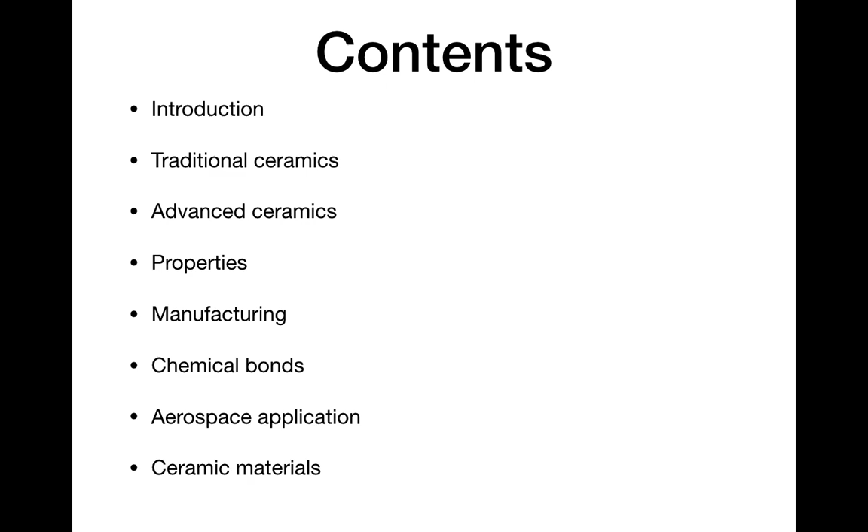Ceramics. A ceramic is an inorganic, non-metallic solid made up of either metal or non-metal compounds that have been shaped and then hardened by heating to high temperatures. In general, they are hard, corrosion resistant, and brittle. It comes from a Greek word meaning pottery.

The clay-based domestic wares, art objects and building products are familiar to all of us, but pottery is just one part of the ceramic world. Nowadays, the term ceramic has a more expansive meaning and includes materials like glass, advanced ceramics and some cement systems as well.

Traditional ceramics, also known as pottery, is one of the oldest human technologies that we have seen. It has dated to around 18,000 years old. These are usually clay based ceramics. There are different categories and major types of pottery are earthenware, stoneware, porcelain and bone china.

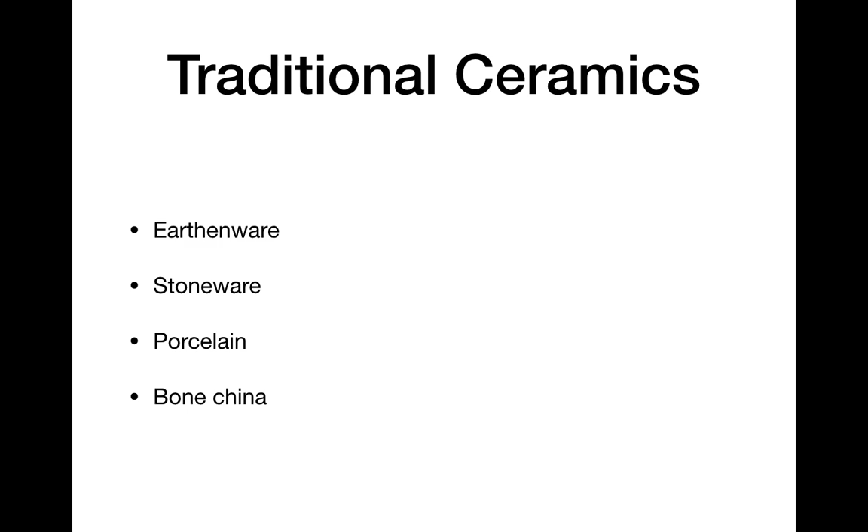Advanced ceramics. Advanced ceramics are not generally clay based. Instead, they are based on a combination of the two, or any one of the two: oxides and non-oxides. Typical oxides used are alumina and zirconia. Non-oxides are often carbides, borides, nitrides, and silicides. For example, boron carbide, silicon carbide, and molybdenum disilicide.

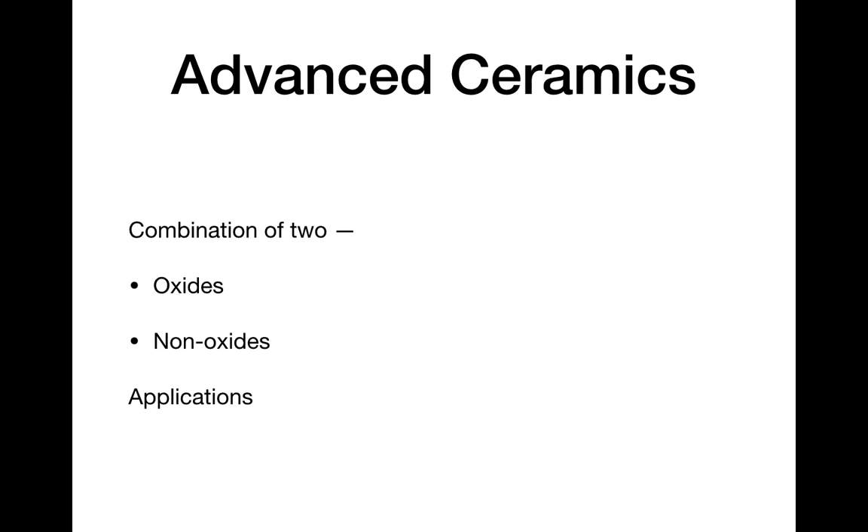Next, properties of ceramics. The most important general property of ceramics is that they are refractory. They are rough and tumble materials that will put up with fair amounts of abuse in the most ordinary and extraordinary situations.

Some of the properties that ceramics have: high melting point, so they are quite heat resistant; great hardness and strength; considerable durability, they are long lasting and hard wearing; low electrical and thermal conductivity, they are good insulators; chemical inertness, they are unreactive with other chemicals.

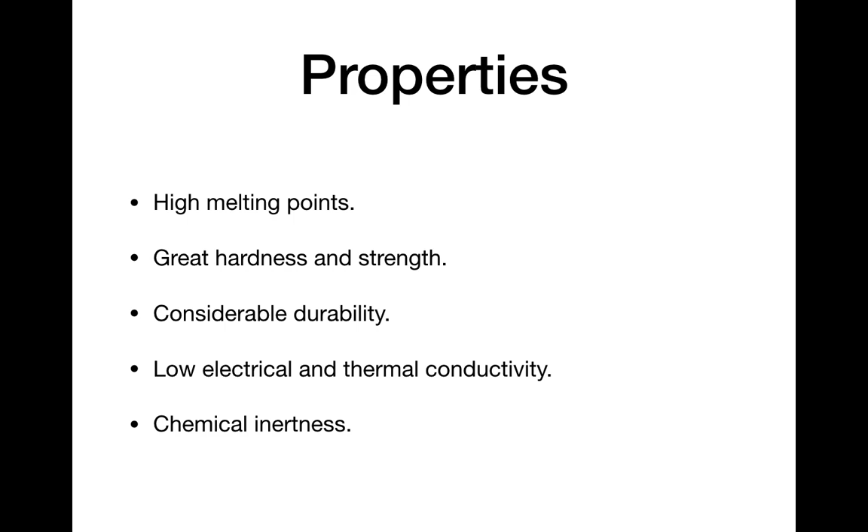So, how do you make these ceramics? The manufacturing process of ceramics generally starts with digging the raw material. So it starts with clay based material dug from the ground. Then this clay based material is mixed with water and other material so that the granules of clay are bonded together.

Next, this clay based material mixed with water and other material is squashed into a shape, or it is molded into whatever shape the product requires. After that, it is fired at a very high temperature.

The US Geological Survey listed six different types of clay usually mined in the United States: common clay, kaolin, bentonite, ball clay, fuller's earth, and fire clay. Each one of these also has numerous different grades and qualities, so it's probably more accurate to talk about china clays or ball clays.

These ball clays are used to make things like fine porcelain, tableware, bathroom suites, but even within a single ball clay mine, different grades of clay will be simultaneously excavated from different areas and kept separate for different end uses.

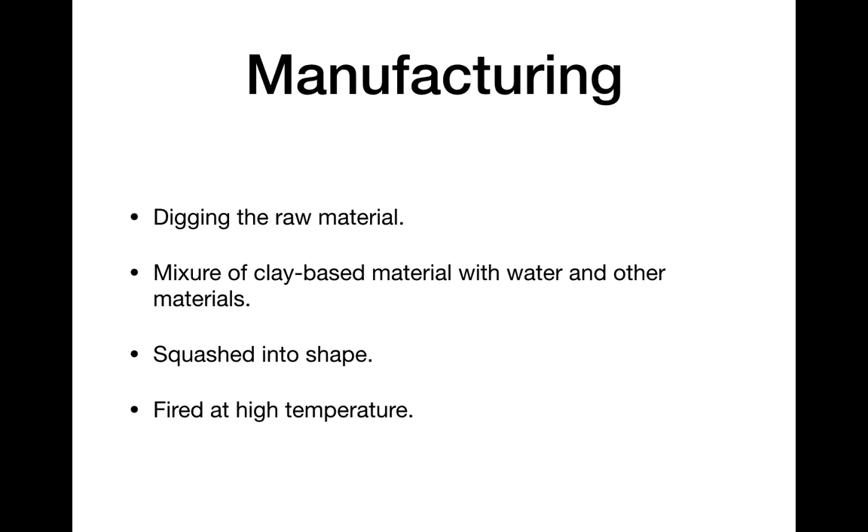Chemical bonds of ceramics. Underlying many properties found in ceramics are the strong primary bonds that hold the atoms together and form the ceramic material. These chemical bonds are of two types. They are either ionic in character or covalent in character. Ionic in character involves a transfer of bonding electrons from cations to anions, while covalent in character involves orbital sharing of electrons between the constituent atoms or ions.

Covalent bonds are highly directional in nature, often dictating the types of crystal structure possible. Ionic bonds, on the other hand, are entirely non-directional. This non-directional nature allows for hard sphere packing arrangements of the ions into a variety of crystal structures. This comes with two different limitations. The first limitation involves the relative size of anions and cations. Anions are usually larger and close packed, as in the face centered cubic or hexagonal close packed crystal structure found

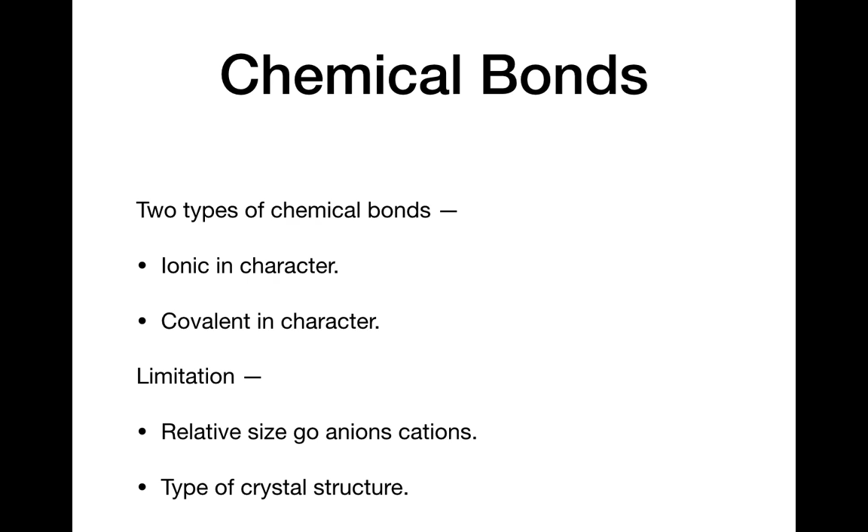Most of the primary chemical bonds found in ceramic materials are actually a mixture of ionic and covalent types. Secondary bonds are also important in certain ceramics. For example, in diamond, a single crystal form of carbon, all bonds are primary, but in graphite, a polycrystalline form of carbon, there are primary bonds within sheets of crystal grains and secondary bonds between the sheets.

Next, the use of ceramic materials in aerospace. Ceramic materials used alone or as part of an overall material system have several attributes of great benefit in many aerospace applications. In simple terms, they offer higher temperature capability than metals. They are exploitable through both increased combustion temperature and reduced component cooling requirements in gas turbines and in high velocity aerodynamic control surfaces in missiles and aircraft.

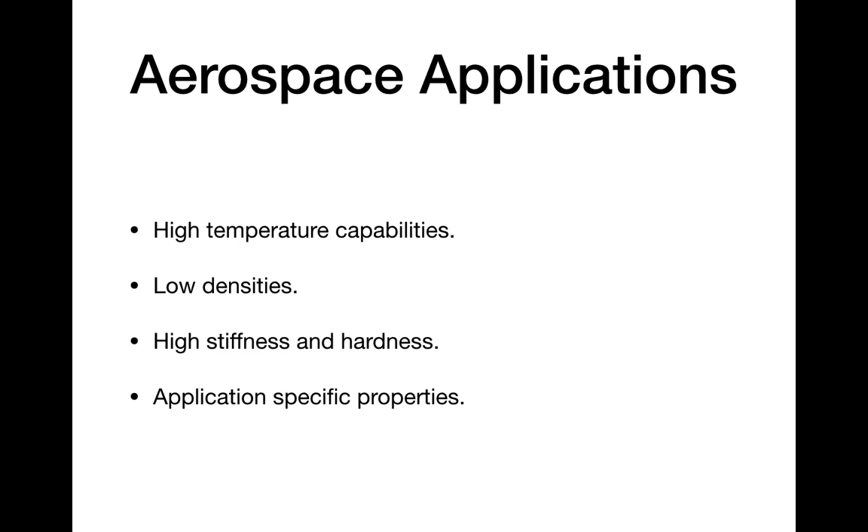Ceramics also have application in jet engines. For example, they are used in gas turbines, which work by burning fuel mixtures at very high temperatures to make fiery exhaust that powers a plane through the air. Ceramics are used as ceramic tiles in the outer skin of the space shuttle to protect it from burning up on its way back to Earth from space. The next generation space planes are expected to use high performance tiles made from ceramic matrix composite, which is already being used in Falcon from SpaceX.

Ceramics are used in construction. Even in a modern age of plentiful plastic, bricks, glass, cement, concrete, porcelain, and tiles of all kinds are still the raw materials from which most buildings are made. The tools used in construction sites are often made with ceramics too, whether you are cutting glass, drilling holes in tiles, grinding concrete, or sawing through bricks. Engineering ceramics like tungsten carbide or silicon carbide will help you knock more traditional ceramics into shape, generally working better for longer than traditional tools made of steel.